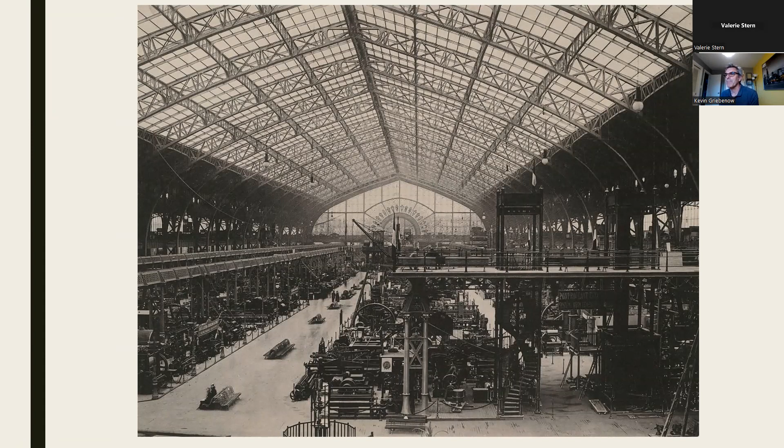To me, as an engineer, this building that was built in 1889 is amazing, and it's remarkable that we would build this and then tear it down. If you look in the lower left corner, you can see two people sitting on a bench, giving you a sense of scale for just how big this building was.

This one is 1,708 feet long by 370 feet wide, and the arches are three-pinned arches - not a continuous arch like in St. Louis - with a pin at the bottom, so the bottoms could move, and a pin at the top. Because of this construction, engineers at that time could figure out the forces in these arches and design accordingly. At the time, this span was the largest interior space, covering about 20 acres, or about 15 football fields.

Now we jump to 1890, warming up for the competition to host the 1892 fair celebrating 400 years of Columbus coming to America. The official census revealed Chicago had passed Philadelphia and Brooklyn to become the second largest city in the country, and some felt Chicago was going to surpass New York at the time.

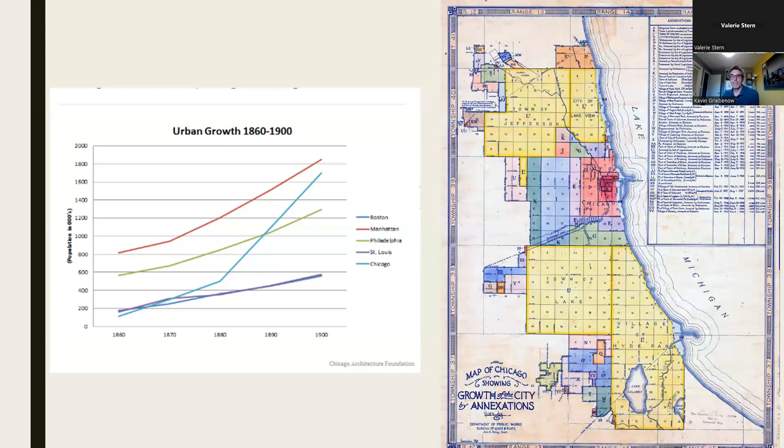As I mentioned, one of the things that I speculated helped Chicago get the Columbian Exposition was the Auditorium Building. It was built in 1889, and it's still there at Congress and Michigan Avenue. At the time, it was the largest and most expensive building in the United States, and the tallest in Chicago. It was multi-use: an office building, a hotel, and it also had a theater for the opera company, serving as home for the Chicago Grand Opera Company. The intent was really to put Chicago on the cultural map, to show we're not just this wild, wild west frontier, that we do have some culture out here.

Now we're starting to plan for the fair. One of the people very much involved is Frederick Law Olmsted. He's in his 70s now, working on the Biltmore Estate, still working in New York, taking trains all over to these sites. Before this, he had prepared a plan for Jackson Park, with some of the buildings laid out for the fair.

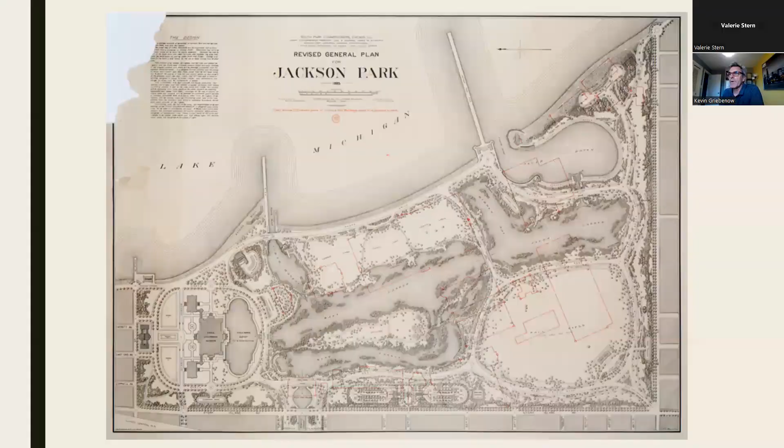Here is a picture of the grounds. In 1890, he gets all the movers and shakers together, the architects who are going to help design all these buildings, most of them from the East Coast. He takes them to the site where the fair is going to be, in carriages, in January of 1891, on a cold, blustery, overcast day. They look at this desolate site, and one of them says to Daniel Burnham, 'Do you mean to say that you really expect to open a fair here by '93?' Burnham replies, 'That point is settled.'

So in about two and a half years, they're going to go from this to a fairgrounds that's going to be able to host 200,000 people a day.

So to do this, he literally has to come up with, I would say, a construction trailer. This is Daniel Burnham's construction trailer, if you will, or his supervision headquarters, the shack, complete with a wine cellar. At the time, he had moved from the city of Chicago up to Evanston, so a lot of the time he would just stay here instead of commuting from Jackson Park to Evanston. During this construction time, he would also host concerts and review sessions in the shack.

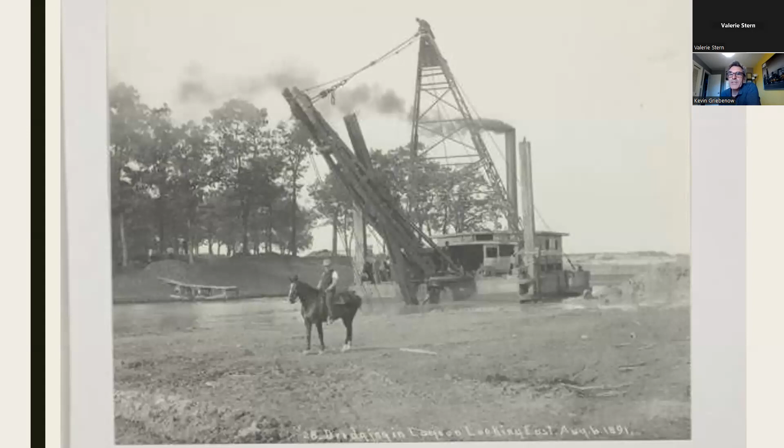So in addition to dredging, he realized that he had to raise this land up above the lake. So he brought in vast amounts of manure from the stockyards, and about 200,000 yards of dirt were brought in by railroads. To me, I don't think it's a coincidence that some of the main money behind this were the owners of the Union Stockyard. So I wonder where that manure came from.

So even during construction, about 10,000 visitors a day visited the site. Originally it was free, but then they realized they were missing an opportunity, so they started charging initially 25 cents, and that was raised to 50 cents with all these people coming just to watch the construction.

Now we get into one of the, to me, a very interesting engineering aspect of it. Looking at the time in 1890, the life expectancy in the United States was 44 years, and the child mortality rate to 5 years was about 280 per 1,000 births - I would say a kid had a 1 in 3 or 4 chance of not making it to the age of 5. Right now, the life expectancy is 79 years, and that child mortality rate is 7 out of 1,000, or that is reduced by 40 times, not 40%, but 40 times.

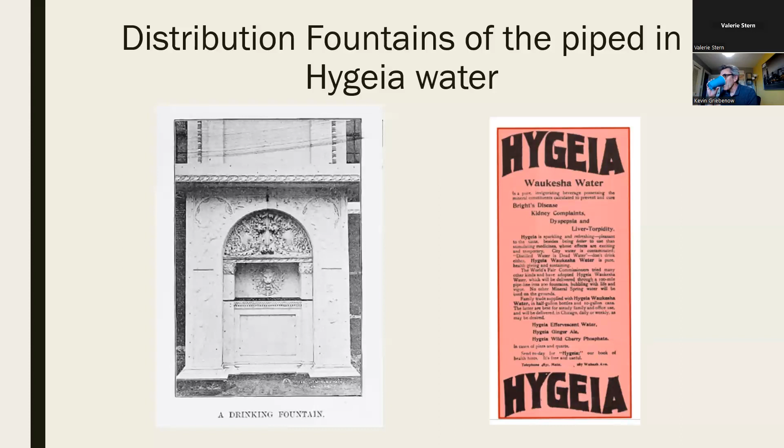Another issue then - if everybody's drinking water and you're having fairgoers, what are you going to do with all this wastewater? To me, it's amazing, again, this temporary city, that they had sanitation facilities for 30,000 workers and 200,000 visitors a day. They had a treatment facility that would handle about 10 gallons per person, which is much less than what we use today. They had 70 miles of sewer plumbing installed, and the sewage system treated 6 million gallons a day, similar to a city of 600,000. The sewage was chemically treated and incinerated on site, and then the clear water was piped into Lake Michigan. There was a whole paper presented on this, and there were actually tours given of the sanitary facility. So I would say this is like the birth of wastewater treatment for civil engineers.

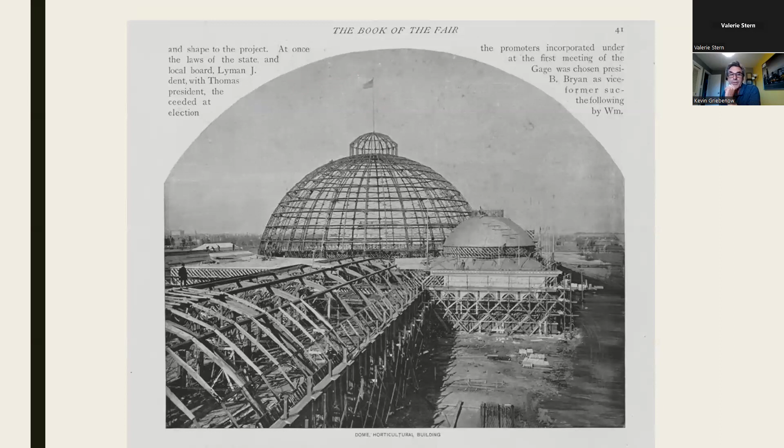So you build all these buildings, and they wanted it to be a white city in the classical form, which we'll see here shortly. They realized that to paint all these buildings, a bucket and brush just wasn't going to cut it. So to me, this is one of the first uses of spray paint as we now use it. All the buildings were spray painted white so they could accomplish it in time. What they were spraying on was almost like plaster of Paris, but it's called 'staff' - invented in France, it's kind of a plaster of Paris with hemp fibers in it. One thing with this - all the buildings were covered with it, and it's not very durable, so you had to really have a good paint on it to protect it from the weather. Also, one note - this staff is very flammable.

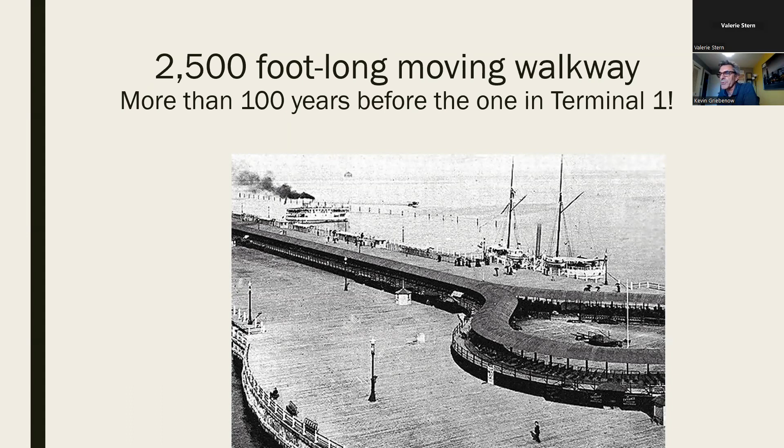One thing we don't realize is that the city at the time had horrible air quality, because they were burning a lot of coal to power steam, boilers, and elevators. But at the World's Fair, no coal was burnt at all—it was fuel oil, so that soot wouldn't get onto the white buildings. That's another reason it was called the White City.

Just a quick note, you can see the pier sticking out to the bottom right. It's also interesting that the first thing you come into at the fair is a casino. Funny how some things don't change.

Another amazing thing was the intramural train you could ride from one end of the fair to the other. The really interesting part is it had an electrified third rail. Prior to that, other cities had wires above streetcars, or a cable underneath that the streetcar would grab. But this is really what we know as the CTA, developed here in 1893.

Originally this was free for fairgoers, so you could ride it from one end to the other, and some people just rode it all the time. They finally had to get conductors on to actually get people off, because it was such a good deal. People who had come from the countryside were just in amazement—it was worth its weight in gold just riding this back and forth.

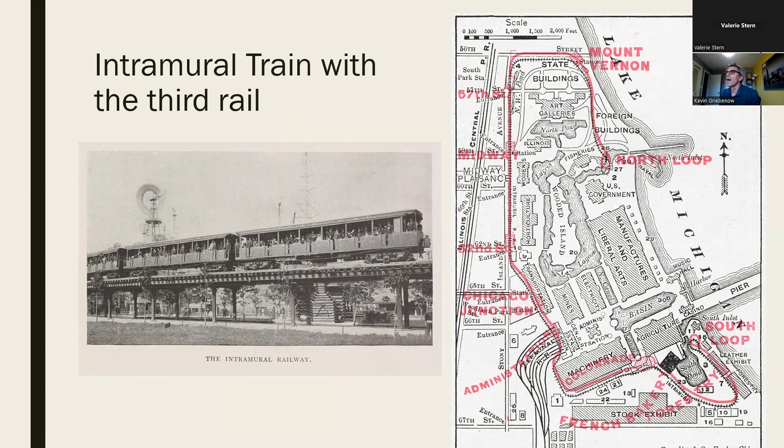Here's another view, looking just like the CTA track, with a view of the fair's restaurants and exhibits. In this case, we're in the livestock area, so I assume we're at the south end where the agriculture and machinery buildings and the south pond are. I don't know who took this shot since there aren't many people in it, but it's a great shot of the rail and the fair.

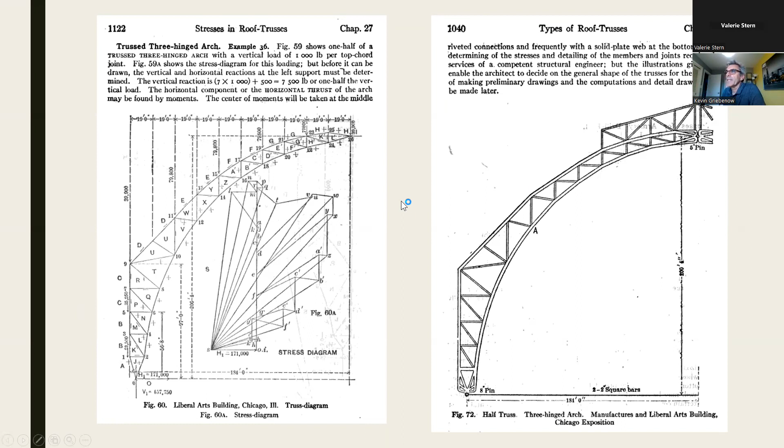And then the actual truss design - you can see at the very bottom there's an 8-inch pin, and at the top there's an 8-inch pin, and the clearance is about 200 feet to the very top. And this is only half - you can see it's 181 feet, so it's about 360 feet wide total. This is the basic building block of the manufacturing building.

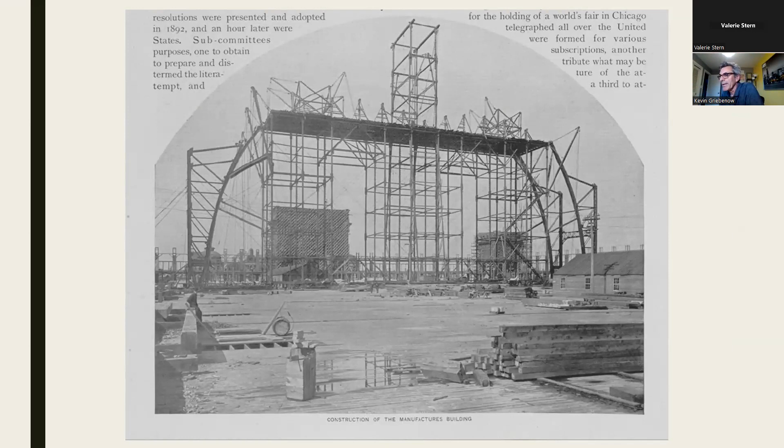So here again, we always assume there's cranes, but you can see that just to build this, we don't have cranes. They're assembling the truss. To me, it's a fascinating endeavor building these trusses without a crane, just building falsework - almost like you have to do for a stone arch, where you build false support until you can get all the way to the top. This building used 6,000 tons of steel, 1,000 tons of iron, and 17 million board feet of lumber - and again, it's just for a temporary structure for 6 months.

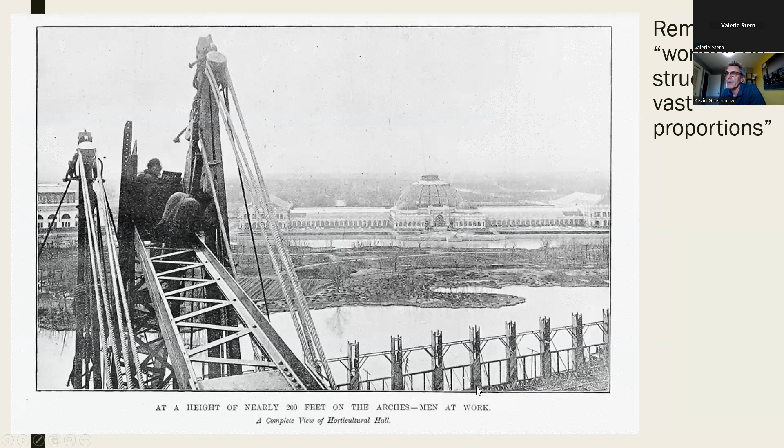And here we are assembling, and again you can see there's two men there. One man, very faint, kind of to the right of the bottom of that arch where that 8-inch pin is - you can see that thing could move, but just the size of this space blows me away. To me, it just would have had to be a fascinating space to be in.

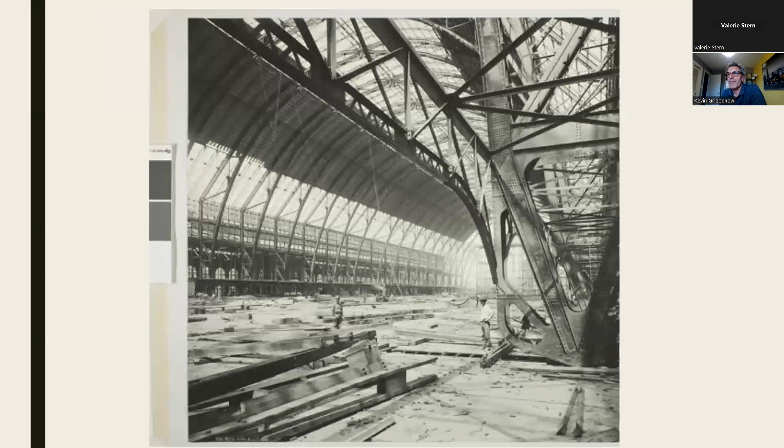But then there's also - so you're designing this, and it's temporary, so you want to build it as light as possible. A storm hit on June 13th, 1892, and knocked half the building down. When they looked at the design criteria, it was not designed for wind loads. Also, it was not designed for snow load, but yet it was being built in the winter because it was going to open up that spring, May of 1893. So the previous engineer is fired, and Mr. Shankland is hired. He also goes on to be the builder of the municipal pier, or as we now know it, Navy Pier.

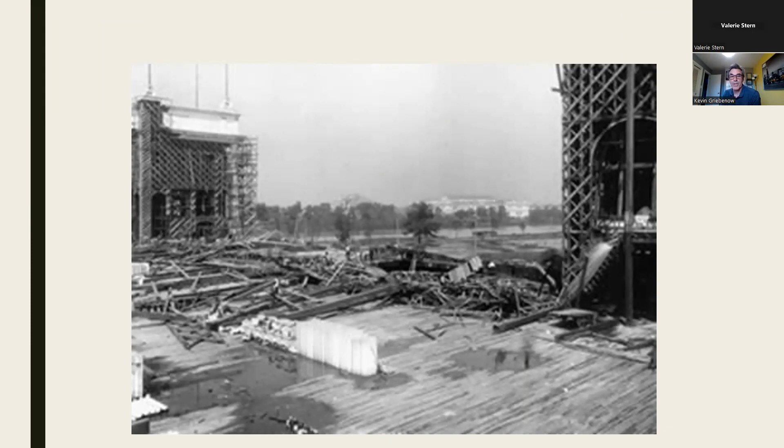To me, just the roar there would be amazing. And just to drive this point home...

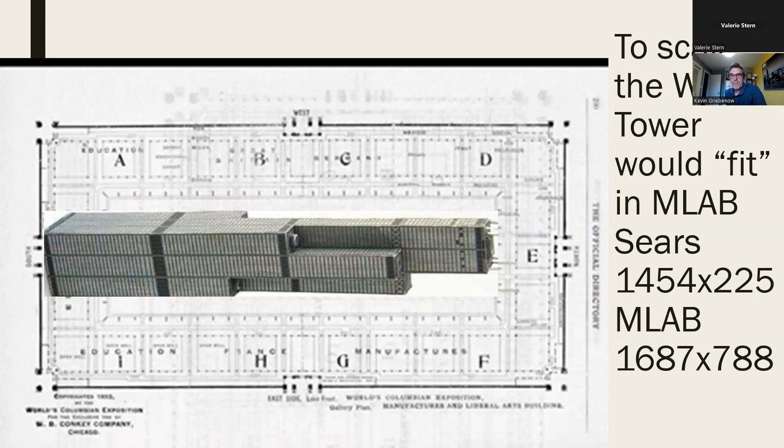I put the Willis Tower—excuse me, it's spelled Willis but I think it's pronounced Sears Tower—so this is, I think, pretty close to scale, just to get a sense of how big this building is. That's the Sears Tower laying on its side. And if you could scrape off the corners at the base, it would fit inside with room to spare—it wouldn't even go all the way to the other side. So it's just an amazing building at the time.

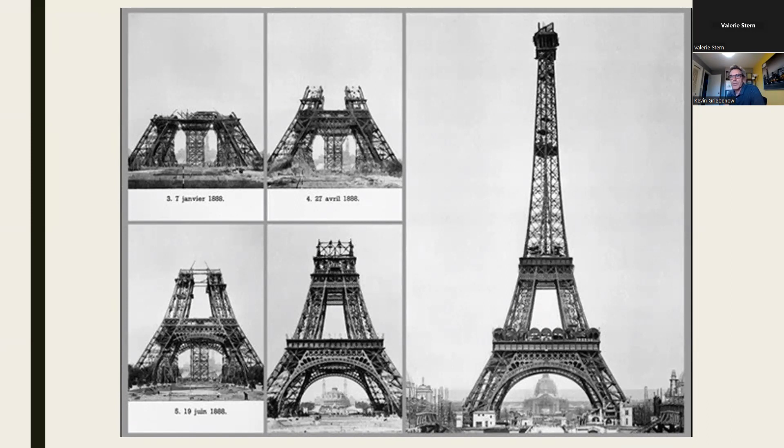So what are we as Americans going to do? As Daniel Burnham said, we have to figure out how to out-Eiffel. The Eiffel Tower was about 1,000 feet tall and about 400 feet wide. At the time, it was the tallest structure in the world, and it beat out the Washington Monument.

So, as I said, we had to out-Eiffel, or as he put it to the planning committee, something novel, original, daring, and unique. Here's Daniel Burnham and his partner, Root, who, sadly, dies of pneumonia—I think it was January 1891—right when they're really just starting to get into the planning of that.

Some of the proposals were to cover the whole fair with a 3,000-foot diameter tent. Some people said build a 1,000-foot high tower. But a steel inspector for the fair, George Washington Ferris, sketches a large wheel, like spokes in a bike wheel with tension rods. But Burnham says it looks too fragile and dismisses it. And they basically run out of options.

And on December 16th, 1892, they got nothing else. So they said, hey, Mr. Ferris, you've got to build that. And then you've been selected. But he's only got six months to design, fabricate, and build it on the site.

So it's amazing—this is their office, on the top floor of the Rookery building, right there on South LaSalle Street. We give tours of the building, and they found the fireplace. So there's me sitting at the fireplace of Burnham and Root's office there. Because when these buildings were built, the top floors were least desirable—this was before elevators and heating and air—so the designers usually had the top floor.

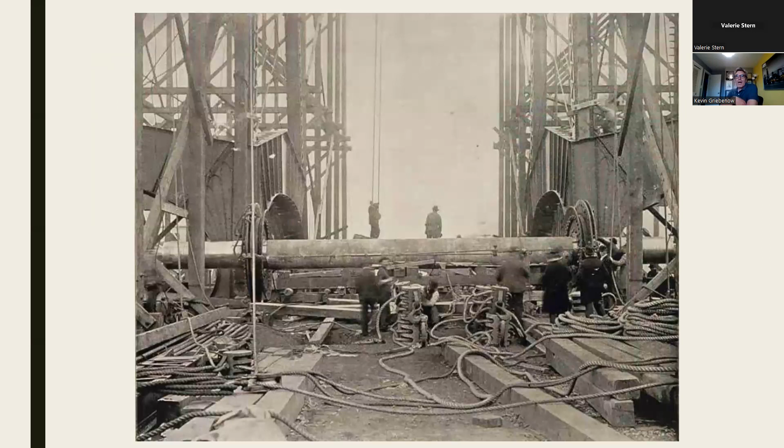So here we are—the wheel of this Ferris wheel had to be lifted 140 feet in the air, and we don't have cranes. Can you imagine? You can see some of the block and tackles there right in the front, what they had to come up with to lift this 90,000-pound axle. At the time, it was the largest piece of steel forged at the time. It was forged in Pittsburgh, and then brought here—I can't imagine just the train and getting it to the site had to be a major undertaking.

And I also love this picture. It reminds me of those photos a lot of us remember, of steel workers in New York eating their lunch sitting on a beam high above the city. Well, here are the workers—they're actually reassembling the Ferris wheel up by Lincoln Park at the end of the fair, where it resides for a while. But here they're standing on the axle about 140 feet in the air. To me, just an incredible thing—the worker safety there is amazing.

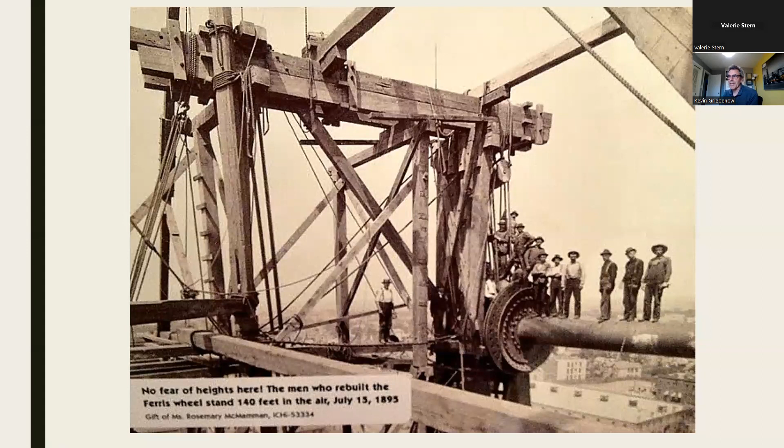I'm thinking of the photo called Lunch Atop a Skyscraper, with the 11 steel workers. I think this one is very similar, if in many ways not better. I love these pictures of assembling it. This is still how they do it, how they figure this out, basically putting it together spoke by spoke and just kind of pushing it around.

And again, just the scaffolding, because we don't have cranes at the time. It was designed and constructed by George Washington Ferris, and it had more than 10,000 parts. Would you want to be the first one to ride it, making sure all those 10,000 parts were there? It took 5 months for him to design, fabricate, and assemble, and it was adorned with 3,000 lights.

Here's an overall picture. This was on the midway that extended inland from the fairground. You can see one of the cabs, larger than a Pullman Palace car, and each one could carry 60 people. With 36 cars, it could hold up to 2,160 people. To me, an amazing ride.

Can you imagine people coming from anywhere to see this? Here is the view you would see from the top of the Ferris wheel. A reporter, Robert Graves, said it is an indescribable sensation, revolving through such a vast orbit in a bird cage. Over the 19-week run, since it didn't get started right away, 1.4 million people paid 50 cents to take the ride. You only went around twice, but it took 20 minutes to do that.

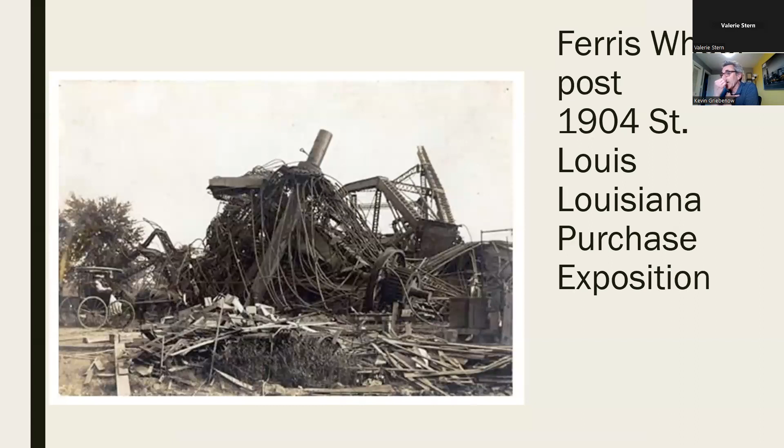It was a moneymaker for the fair, but George Washington Ferris ended up with a bunch of lawsuits and did not do well with it. Kind of sad, this was just on the news recently, that St. Louis had a fair in 1904 to celebrate, a year late, the Louisiana Purchase. The Ferris wheel was moved there, and at the end, someone wanted to move it to Coney Island, but it was too expensive to move. So they decided to blow it up with 100 pounds of dynamite and sell it for scrap. To me, it's a sad ending for what was an amazing engineering marvel.

So here I tried to summarize some of the lesser-known engineering achievements at this World's Fair. A couple other things I didn't mention: there were no power poles, all the electricity was buried. Stormwater was separate from wastewater, and we don't adopt that until late in our time. To me, just amazing things: the Ferris wheel, the world's largest building, and AC taking over DC. To me, just an amazing thing. Also, as someone said, with Frederick Law Olmsted, massively reshaping the landscape there.

I didn't want to end on that note. This Columbian Exposition takes city planning to the next level, and I think ultimately clearly leads to the 1909 Plan of Chicago, which adopts a very classical motif for the buildings. This is a rendering of the Civic Center Plaza, where he felt City Hall should be. This is actually located at the Spaghetti Bowl, just west of downtown.